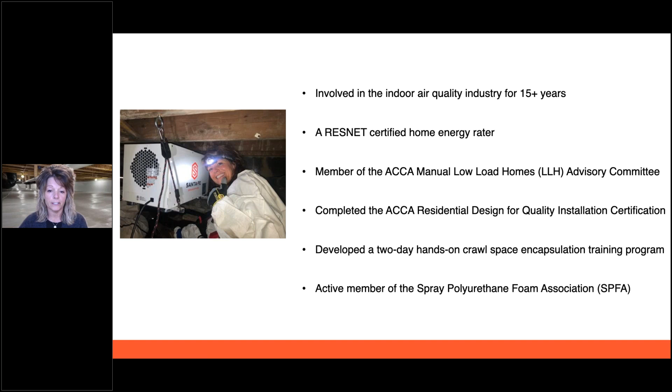So I've been involved in the industry for almost 20 years now. I'm a RESNET certified home rater, member of several ACCA committees, actually teamed up with some building science experts to develop a two-day crawl space encapsulation training course, and I also sit on the building envelope committee for the Spray Foam Association.

Now, before we dive any deeper into this, there's always one basic component that I want to make sure that everybody understands, and this is the second law of thermodynamics. And this is really what we need to think about when we are looking at dehumidification in homes. And that is hot goes to cold, wet goes to dry, and high goes to low. So anytime that we go in and we look at a customer's home, decide if dehumidification is the answer, we really need to look at what's going on to make sure that when we apply that dehumidifier, it's going to be successful.

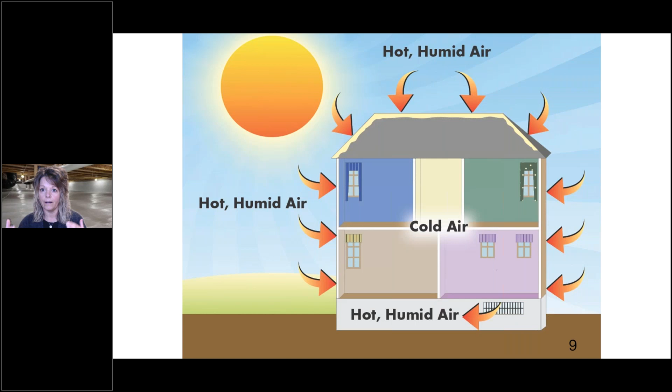And so as we go in deeper on the different code approved ways to condition a crawl space to manage moisture, we always need to keep in mind this thermodynamics law. Hot goes to cold, wet goes to dry, and high goes to low.

So crawl spaces, what is the opportunity for you here? They're widely used in construction. About 250,000 new homes a year are built on crawl spaces, and there's an estimated 76 million homes already in existence that have crawl spaces. Now, a majority of them are still unconditioned or open vented crawl spaces, but we're seeing more and more in the last several years a lot of homeowners looking for their crawl spaces to be closed, as well as building codes and green building standards now encouraging crawl spaces to be closed or encapsulated, especially if the mechanical systems are going to be located in those areas.

So we are seeing building codes incentivizing builders to close those crawl spaces, because if the mechanicals and the ductwork are going to be located there, we don't want to be sucking in that moist, hot air during the humid hot seasons. So we're seeing more and more this drive for crawl spaces to be closed.

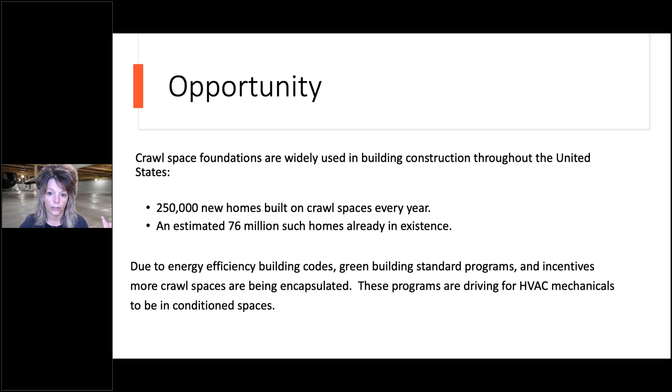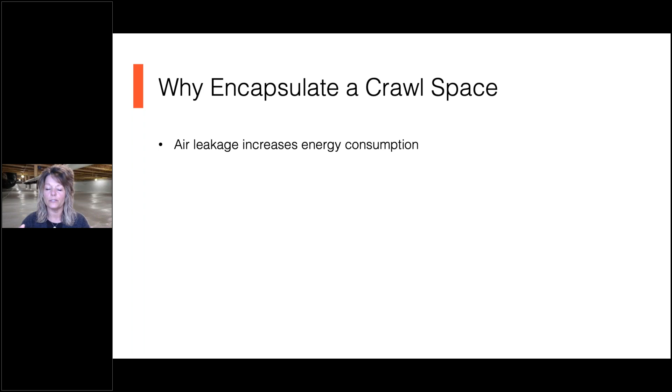So why do we encapsulate crawl spaces? Energy consumption is a big one. If it's hot outside and that air's coming below the home, you're going to be heating up that space. The majority of the energy loss is typically in colder times of the year, like right now, where you have a crawl space that's vented to the outside. Even with that insulation up in the ceiling of the crawl space, we're still bringing a lot of cold air into the house. So energy consumption is a big one. According to Advanced Energy, homes with vented crawl spaces are 19 times more likely to experience high relative humidity levels in excess of 70%.

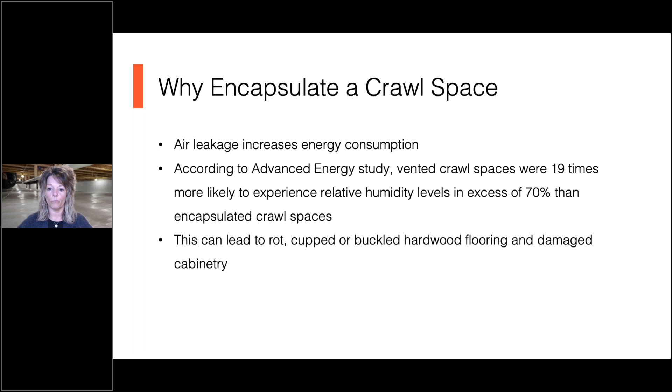This can lead to a lot of rot, cupped, buckled wood, hardwood floorings, damage to cabinetry. So really, again, if it's hot and humid outside and we're bringing in that air below, we're causing a lot of damage below that home that ultimately is going to go into the house.

And termites and other pests thrive. And then high humidity crawl space contributes to microbial growth, structural issues, and poor indoor air quality in living spaces. So there's a lot of reasons to not have vented crawl spaces in our homes.

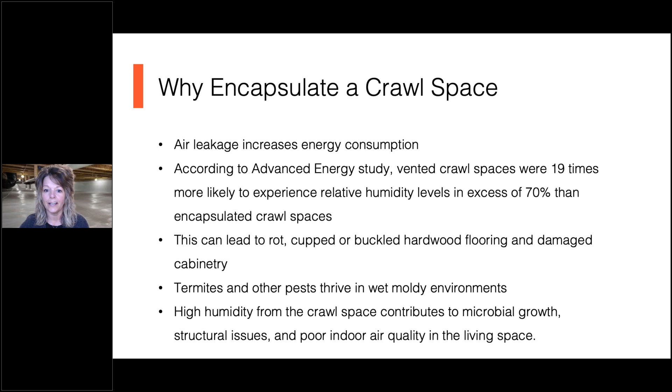We know better now. So encapsulation process, this is about as deep as we're going to go into the actual process, but we got to address bulk water first, air infiltration, water vapor, and then we got to manage moisture. So moisture management is what we're going to focus on of this process, because we're going to be going into spaces that hopefully all this other stuff has already been addressed, but they might not be using the best moisture management system in order to control the RH.

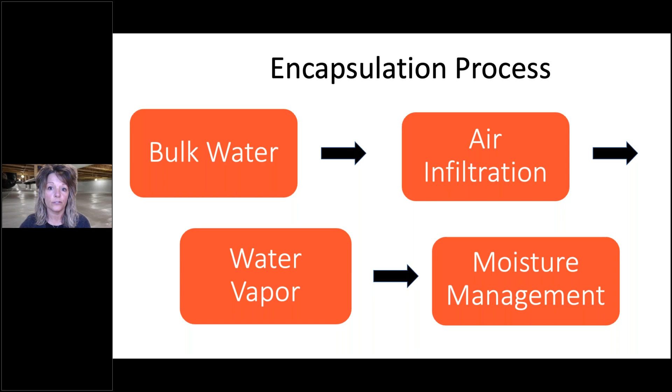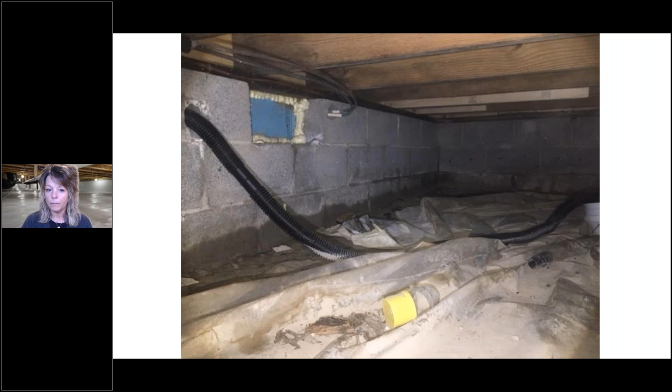Now, this also might be considered a closed crawl space, but adding a dehumidifier to this, you're probably just going to end up with an unhappy homeowner, because obviously this has a lot more moisture issues than something that typically just a dehumidifier can handle. So if you are into fixing crawl spaces with liner and other things, you could probably tackle this and add a dehumidifier. If not, someone who does closed crawl spaces for a living would probably have to come in and do a little bit more work on this before a dehumidifier could be applied to this house.

So moisture management, high humidity, even in closed crawl spaces without proper engineering of some moisture management system, they still will experience high humidity levels at certain times of the year. So that's going to be damage to the home. If anybody in the home has health-related respiratory issues due to possible microbial growth and other things that can be affected by high relative humidity, that could be an issue. Mold problems and pest problems. Of course, if you're in the pest industry, you know that pests like high humidity.

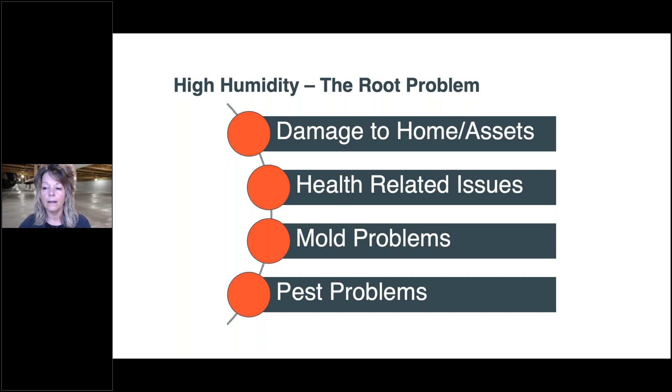So 85% and above, we get wood rot, blistering of paint. 75% and above, we get cupping of hardwood floors, staining on walls and ceilings. And when you're consistently above 60%, there are conditions that are created that are good for mold and mildew growth, or microbial growth also, as we will relate it to here.

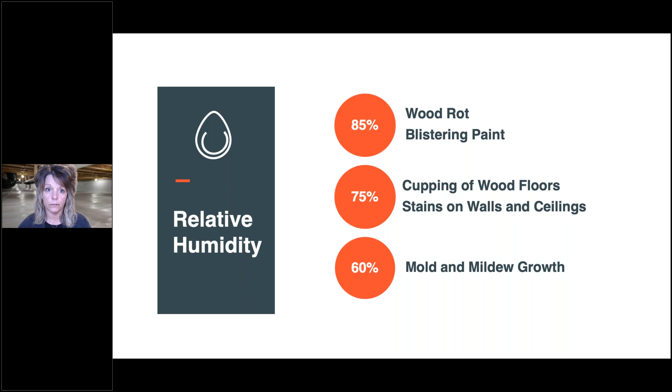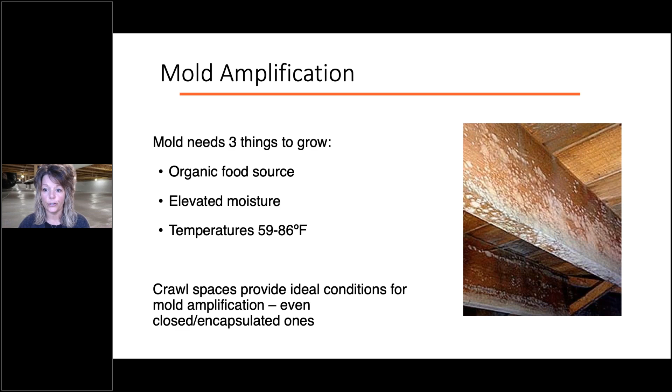So mold needs three things to grow: organic food source, elevated moisture, and temperatures. So crawl spaces, even when they are closed or encapsulated, can still have that elevated moisture. They still have those temperatures, and they still have the organic food source. So even if they are really well closed crawl spaces, but they're not using something to actually remove moisture, they still can have high moisture levels.

So this is just kind of in here because unless you are a qualified mold remediator or someone who has the certifications to identify mold, we do not encourage you to ever use the word mold when you are talking to homeowners. Microbial growth, you probably will see in a closed crawl space in certain climate zones if they are not using a dehumidifier, where there will be some sort of microbial growth, usually in the far corners.

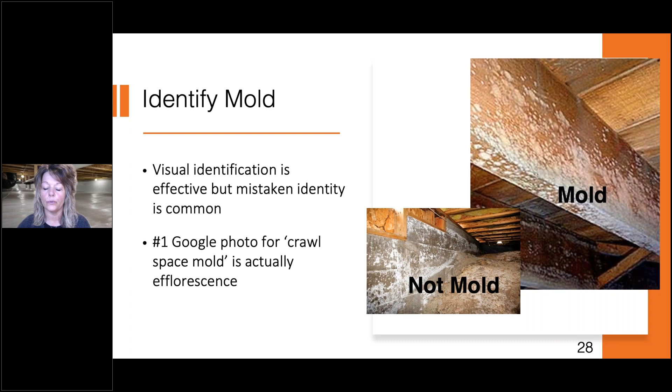But again, we are not here to advocate that you identify that, because if you see here, the #1 Google photo for crawl space mold is actually efflorescence, which is minerals that are coming through that block. It is not mold. So if there is mold, we encourage you to have that homeowner look for someone to remediate that if you are not qualified.

So to stop mold or microbial growth, you got to control the moisture. The wood moisture content needs to be less than 16%, and the relative humidity throughout the space should be maintained below 60%.

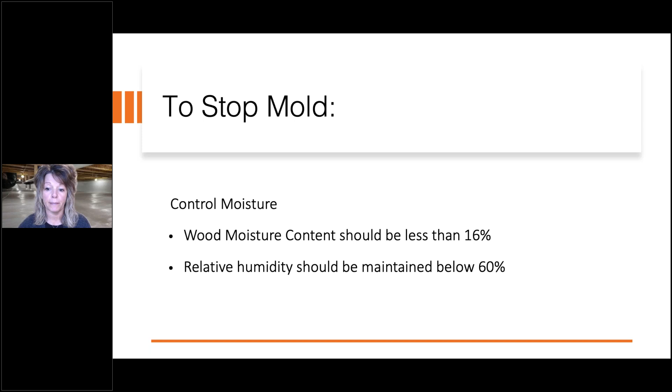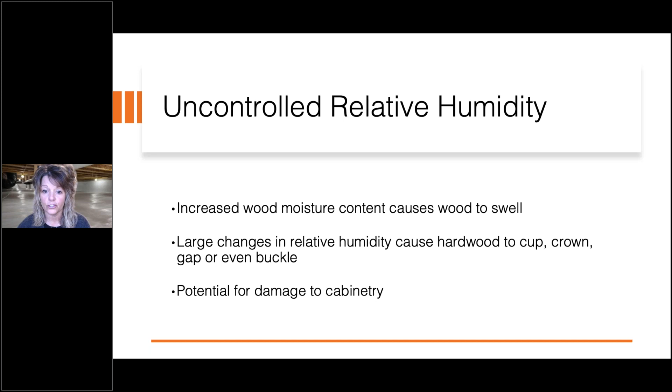So what we're going to talk about now is, according to building code, all of the different ways that are accepted to condition a crawl space. I'm going to throw up the 2021 code because this is the latest, and then I'm going to touch on 2018, and we'll discuss why you need to know these.

2021 will always trump 2018, and 2018 trumps 2015. So if you're applying one of these conditioning codes, ways to meet code according to 2021, that trumps what was in 2018. I had an email recently from a contractor in Virginia saying Virginia's on 2018, so he can't use 2021 - that's not true. If you go to the next year's code, they're not going to penalize you for doing better. So if you go above and beyond to the next code version, it still meets code.

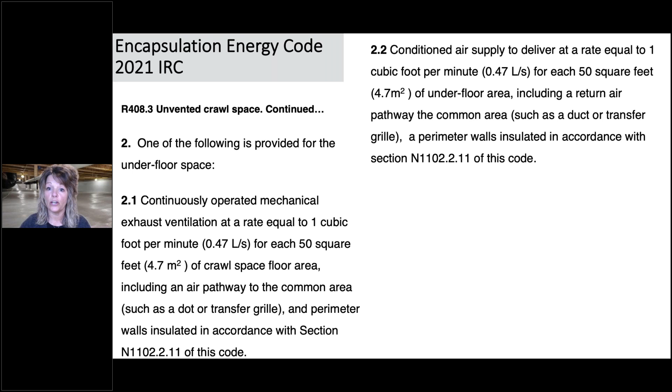Conditioned air supply to deliver at a rate equal to 1 cubic feet per minute, and again, you have to have a return pathway. We'll dive into that deeper.

Plenum in existing structures complying with section - basically using the floor joist as a plenum. I'm going to touch on this. I don't think I've ever seen this in a crawl space - I'd hope to God not to - and we'll go into that, but it can't be used in new construction. It is only in existing structures.

And then dehumidification, sized in accordance with the manufacturer's specifications. We actually worked with Joe Lstiburek from Building Science Corp to get dehumidifiers into code. The first year we worked on this was 2018. So this is the 2018 code version: basically everything's the same except dehumidification sizing requires providing 70 pints of moisture removal per day for every 1,000 square feet of crawl space floor area.

After this was put into 2018, it was recognized that this probably wasn't the best solution, or the wording wasn't the best way to go about conditioning crawl spaces, especially given so much variation in ceiling height and moisture still infiltrating the area. So that's why we went to the next code year - we had it reworked back to sizing in accordance with manufacturer's specifications. It was funny working on this as a group proposing it - they thought it might be too simple for code, since code's supposed to be more complicated. But really, we wanted to make it as simple as possible: size in accordance with the manufacturer's specifications.

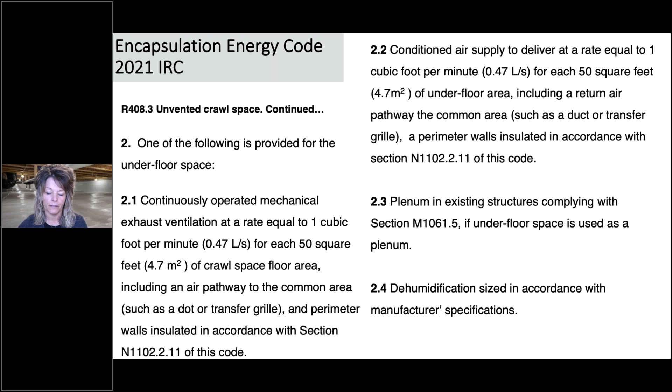We'll dive a little more into what that means. So if your state jurisdiction is on 2018 and it says 70 pints, which is possibly overkill for what's needed, you can pull out the manufacturer's recommendation for sizing according to 2021 code, and that does meet code. Now, you're going to have to work with your inspector on that, but that's the way it works.

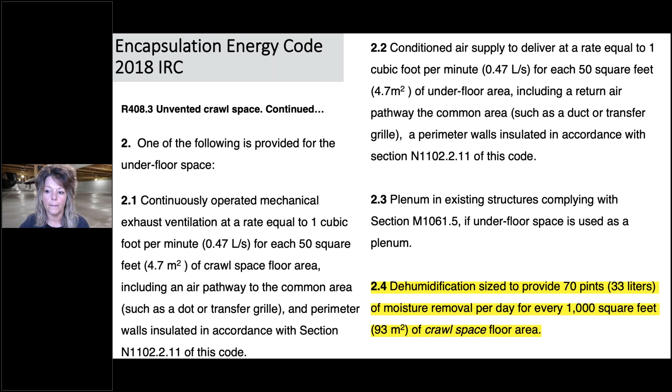Continuously operated mechanical exhaust ventilation.

The pros of this: the equipment is relatively inexpensive, and that's what you're going to see with all of these we go through. Where equipment is relatively inexpensive, that's probably what the builder is going to do, or another contractor comes in and encapsulates or closes that crawl space and sells the homeowner on an inexpensive way to condition it.

So we're going to see a lot of those out there, but the reality is, once that's been operating that way for a while, typically it's not controlling the moisture in those spaces. Conditioning a crawl space, really the only thing you truly need to worry about, if it's been properly closed, air infiltration minimized, bulk water taken care of, water vapor addressed, you're really only concerned about the relative humidity in that space at that point. So conditioning really means moisture control.

The cons of this mechanical exhaust ventilation: it potentially, most likely in the humid times of the year, is going to increase the relative humidity in the home, in the living space. I'll show you why in a minute. Not good for indoor air quality. You can't set it to a specific RH, and it can cause comfort issues throughout the house.

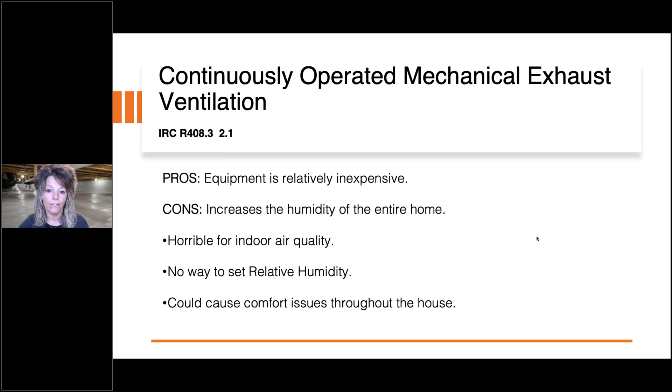The reason being is this is what that is going to look like in the crawl space. Basically, we've got our floor grill, which is allowing conditioned air per code - we have to have this in there to come in from the house - and we are exhausting out the vent in the crawl space. The challenge with this is when you exhaust air out, makeup air has got to be brought into that house somewhere.

The house is always trying to equalize. So when we talk about thermodynamics, the second law, where high goes to low - if we're exhausting here, that means probably in the attic area, we're pulling air in.

So that potentially is bringing hot, humid air from the outside into those upper levels of the living space and pulling it through the rest of the living space to exhaust. We typically don't want to create that sort of negative pressure, especially in hot, humid climates where most of the time is where we are seeing crawl spaces being used.

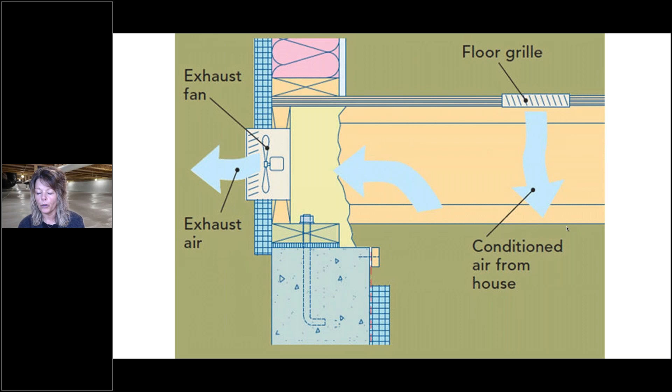So I would not recommend this. If you see this in a house, just starting in the spring, summer, fall, if you're taking RH measurements in that crawl space, you're probably going to have some pretty high levels going on there.

So, conditioned supply air in the crawl space - I see this one quite a bit. Really no equipment is needed besides some supply register and floor register.

The theory is that when you're air conditioning - and I'm looking at it from the humid season - you're putting drier air into that space. The challenge with this is that air usually is cold air, and when you decrease the temperature of air, you increase the RH. So every degree that you go down in temp, the RH goes up 2%.

That's why relative humidity might not be the best way to measure this; dew point oftentimes is. So we're putting cold air into a cool space, and that's only going to happen if the homeowners are running the air conditioning based on what's going on in the living space. So you could have high humidity down there, and just trying to control it by really diluting with some cool, drier air from the living space.

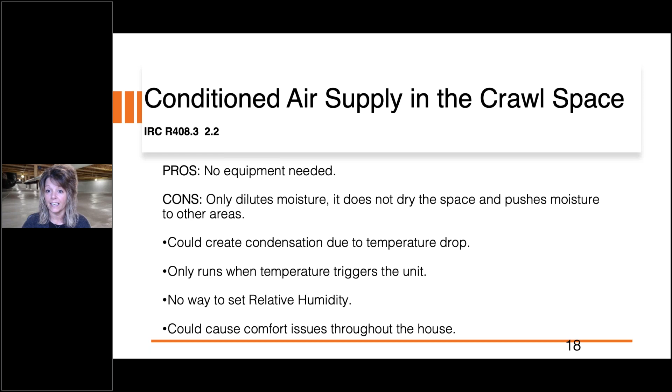So really not a good conditioning method for controlling the relative humidity. And this one I see, again, because it's inexpensive - I see it quite a bit throughout the Mid-Atlantic and the Southeast. That's what this would look like.

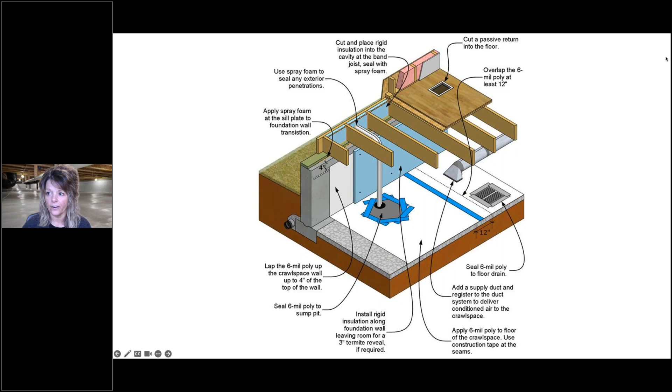They basically tapped into the supply plenum and put in a supply register. Here is a rendering of how that looks: basically you've got your passive return grill here, and then you're doing some supply air from that. Here's another illustration - conditioned air, and then we've got our floor grill there to share the air between the spaces.

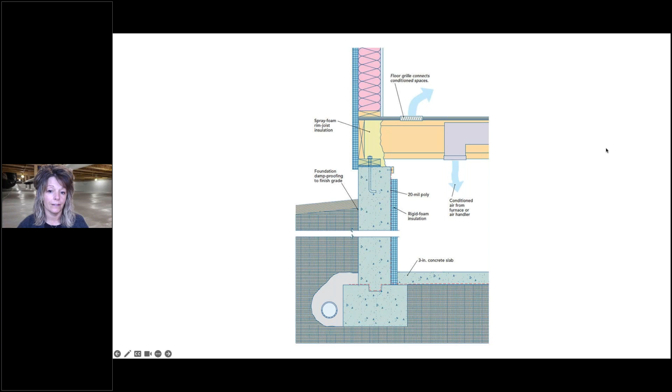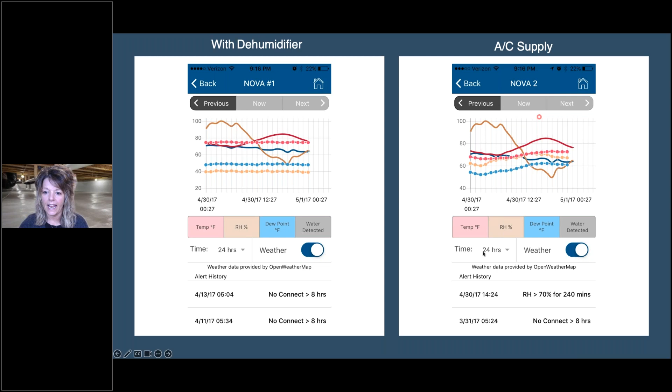Now this other house here, again we've got rainy times, same time of year. We got the dew points getting above 60 degrees. So anywhere the surfaces are 60 degrees or above, we're going to start having condensation. The relative humidity was consistently getting to that 70%. Again, if you're counting on supply air, that means the AC has to be running to put that drier air into that spot. So not a consistent way to control the relative humidity.

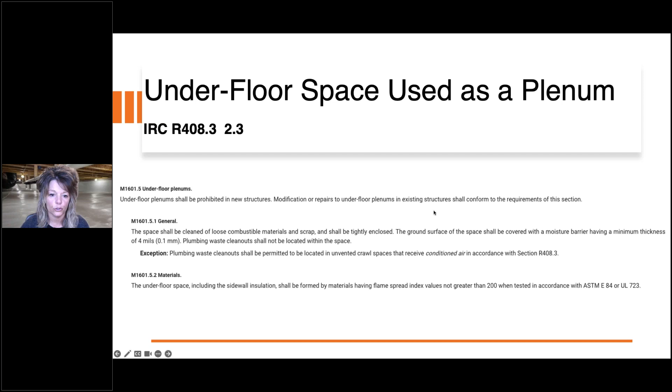So underfloor space used as a plenum—again, if you go into code, this is prohibited in new structures. It's only for repairs to underfloor plenums. Basically what that means is you're turning this cavity in the floor joist into a path for supply and return air for the HVAC system to condition that space.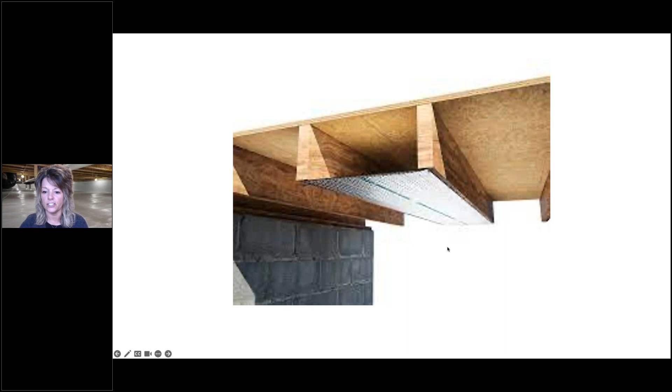I wouldn't recommend it. If you see this in a crawl space, this is probably your number one opportunity to sell a dehumidifier for sure. This air is then traveling throughout their house because it is being pulled or supplied into the HVAC system. So huge opportunity there.

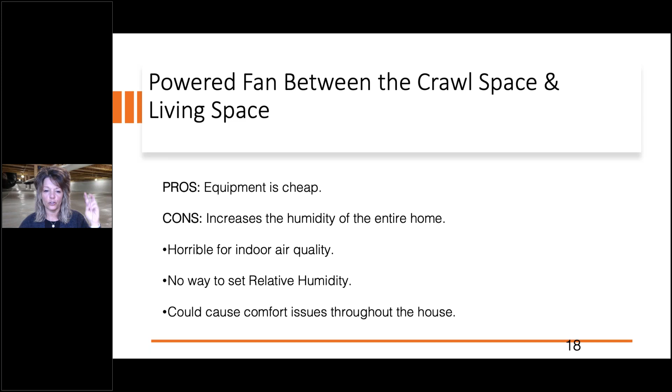Other ways from code years past, or just strategies where someone might not even meet code, might go in and try to condition that space using a powered fan between the crawl space and living space—basically sharing the air between the living space and the crawl space to control the relative humidity. Here's an illustration of what that might look like.

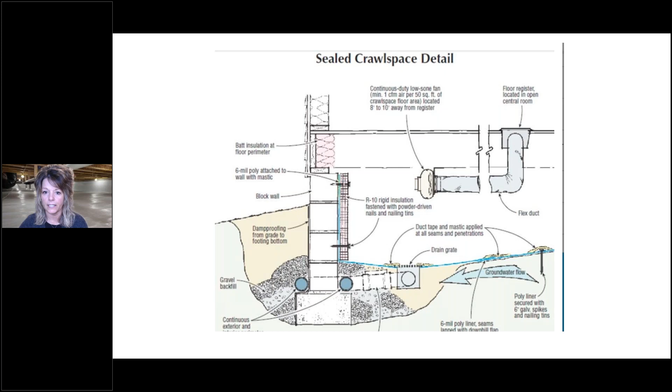So if you see a powered fan—now this is not radon, this kind of looks like a radon fan, but this is not to address radon. This is just to bring in air from the living space. Then there's a powered exhaust fan between the crawl space and the outside. So basically we're trying to control that air below the home using a powered exhaust fan.

These typically run off some sort of sensor that identifies when the RH in that crawl space has gotten too high, and it'll exhaust air out and bring in through another vent makeup air into that crawl space. Again, this only works if it's drier outside than in the crawl space, which typically is not going to be during the spring, summer, fall, the humid times when dew points are high outside.

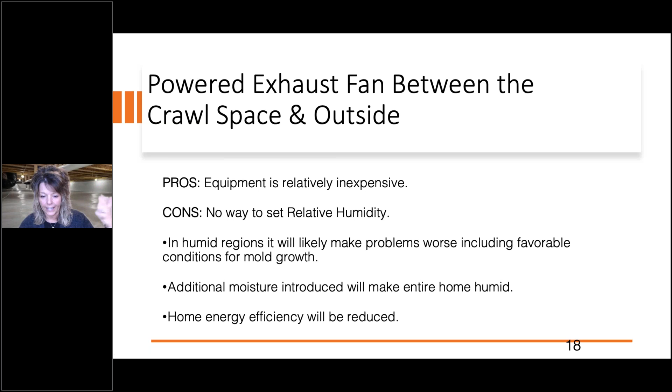And if it's cold outside, which is typically going to be the time of year when it's drier outside than in that space, you're probably bringing in colder air, which can create cold floors, high energy use, that sort of thing. That's what something like that might look like. So these are all ways you can identify potentially what conditioning method they're using for that crawl space.

So the two things they have in common: typically little to no equipment costs. A lot of builders who are getting into closing their crawl spaces, these are typically going to be their first choices for meeting code. They do not manage humidity year round. And the other most important thing is it allows for communication between the crawl space and the living space.

For those of you in the pest industry on this webinar, we know especially for termites, at times there's going to be chemicals that have to be utilized in that crawl space, and typically we don't want those chemicals being pulled in or shared with the living space. Again, all of these allow for that communication, unless you're just using those exhaust fans on the crawl space without the floor grill.

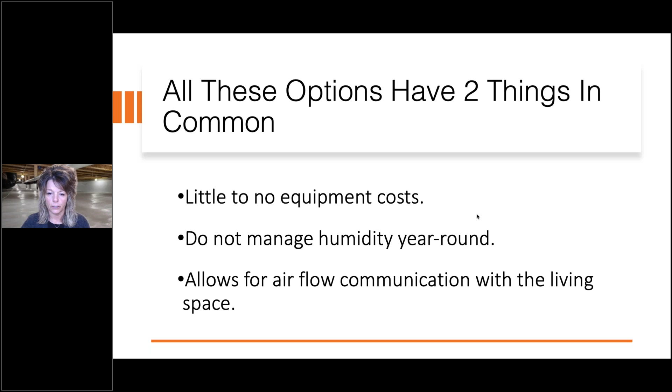So what to look for? If you're going into a home that is utilizing these other methods for conditioning a crawl space, this is a prime opportunity for you to be able to propose a dehumidifier to the homeowners. And there's other things that you can look for to be able to propose this outside of what they're already using.

So immediately, if you walk into that living space and there's musty odors, that's most likely because 50% of the air in the home typically at some point during the year is going to come from that crawl space. That's typically during the heating times, but it's going to be sharing some of that air, no matter how well they try to minimize the airflow from the crawl space to the living space, with caulking and spray foam and all of that. There always is going to be communication to some extent.

So you will smell musty odors in the living space. You're going to do measurements. How high is the RH in that crawl space? That's very important to be able to share with the homeowners.

If you walk into the living space and they've got the thermostat set pretty low during the cooling season, it could be more because of a comfort issue. That's what people do. They're uncomfortable in their homes. It doesn't matter if it's due to high RH or temperature. The first thing they're going to do is go to their comfort control center, which is the thermostat, and start cranking down that thermostat. So it could be just because they're getting high RH from that crawl space.

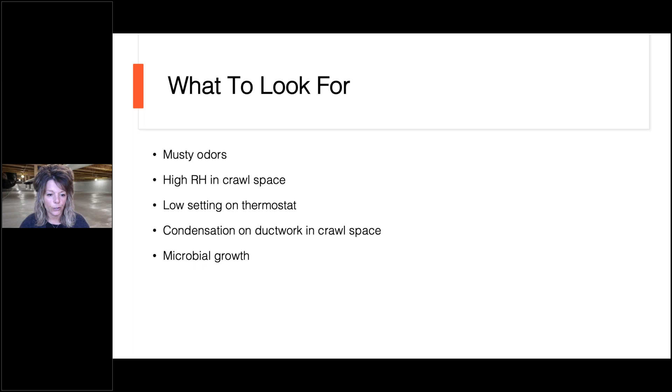Potentially, if there's condensation on the ductwork, that means that there's a high RH in that crawl space. Microbial growth could be any kind of growth in there. We don't know what it is, but we've got an environment where there's microbial growth happening.

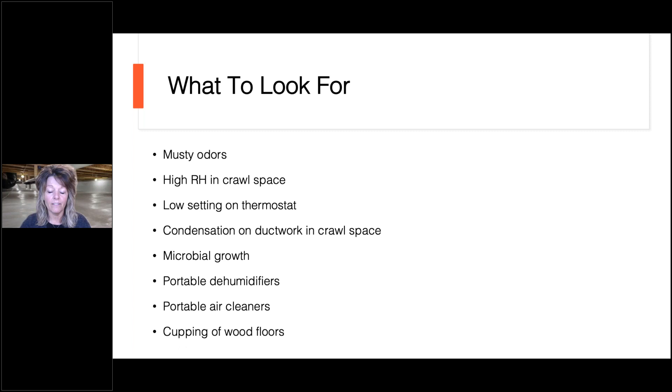If they have turned to portable dehumidifiers, whether there's already a portable in that crawl space because they went out to Home Depot and bought one, or if they're using portables in the living space. Portable air cleaners as well. If you see those going on in the living space, it could be because there's an issue in that crawl space. And then obviously if they've got hardwood floor issues, that's something to look for as well.

So typically meters needed if you are a contractor that wanted to go in and propose maybe a dehumidification. What we recommend is taking readings because homeowners can't argue with the data. So a hygrometer, something that's going to measure that temperature and relative humidity, and then also address some dew point as well as important. And then moisture meters.

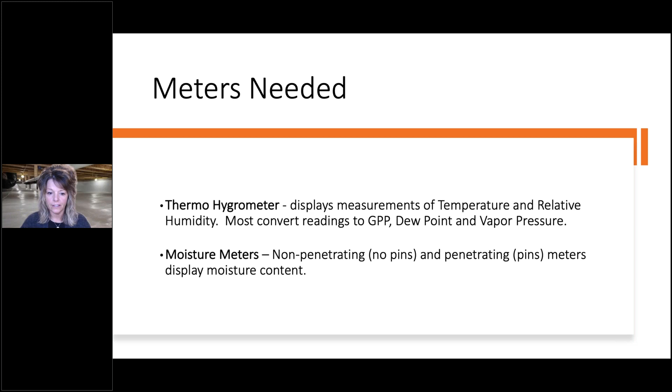So we can get some, you know, the pillars, the floor joists. I usually recommend the non-pin ones because the pin ones will leave some marks in that wood, but get a moisture reading to see, is that wood absorbing moisture to a point that we could have an issue down there.

There's a dew point calculator out there that I highly recommend. It's called dpcalc.org, yep, is the website. And it allows you basically to go in and put in whatever readings you get. You can go in and put in your readings.

Now, this is probably more what's going on outside, not necessarily in that crawl space. But when you play with this and you put in what the temperature is and what that RH is in the crawl space, it's going to give you dew point. And again, dew point is where we're going to see condensation. It's also going to show you about how many days we have to a potential mold risk based on those conditions. So great resource, highly recommend it.

dpcalc.org is where you can find this.

So why is crawl space isolation from the living space so important? Again, when we kind of talk about what's going on in that space, especially when it comes to potential pesticides being used, pressure treated wood that's used. We want to isolate the crawl space from the living space as much as possible. And there's an article out there that talks about all the contaminants that can exist in a crawl space.

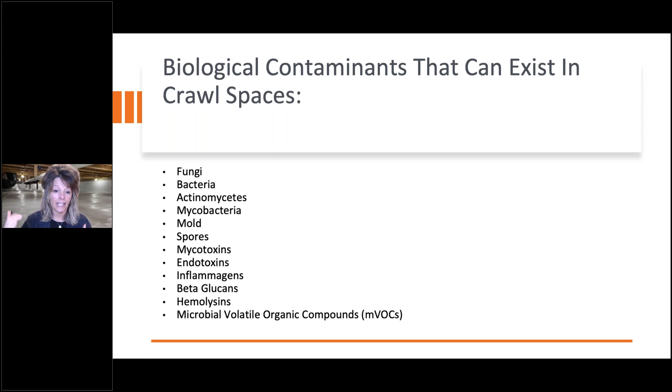So a lot of times, all those other conditioning methods out there are sharing living space air with crawl space air. My recommendation, and one of the biggest perks of using a dehumidifier, is not to have to do that, but to isolate those two spaces as much as possible. That's a huge selling point of using a dehumidifier in a closed crawl space versus all these other conditioning methods.

So finally, dehumidification size in accordance with manufacturer's specifications. It is the only way to truly control the relative humidity in that space to a set RH point. It can also decrease the humidity in the living space, because if we control it below the home, it won't be making its way into the home.

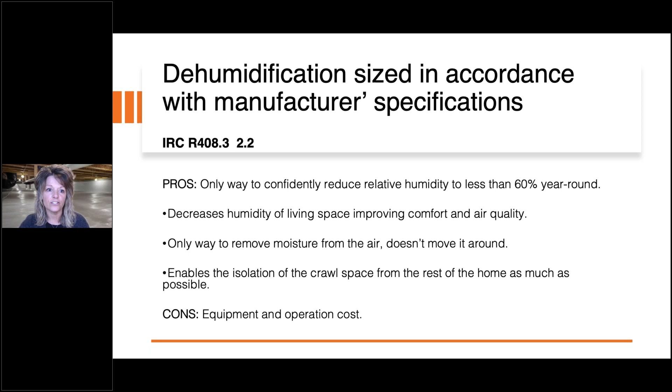It enables the isolation, so we're not sharing any of that air with the crawl space. Now the con is the equipment and operation costs. But the reality is there's always going to be an energy penalty for using dehumidification.

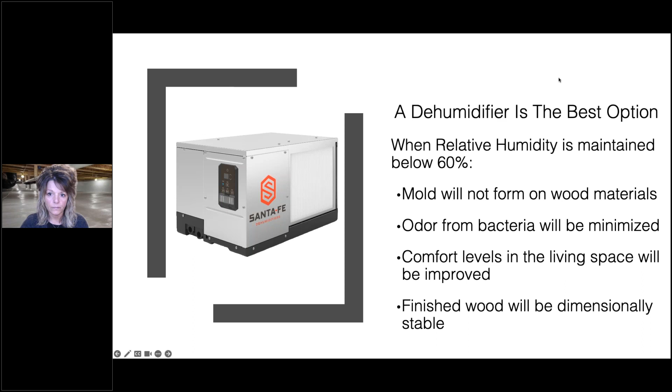So humidity removal, this is the key, is the only solution with a dehumidifier. And it's removal, not dilution. All those other forms of conditioning a crawl space are dilution.

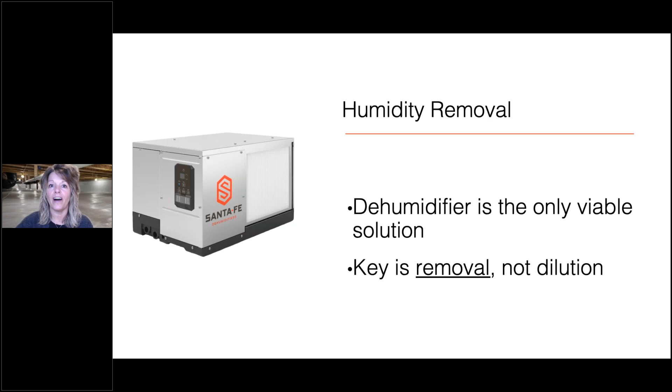And the more energy efficiently we see homes being built - the whole point of building an energy efficient, high performance, tight home, which code is getting us to those levels - is to run the largest system in the house as little as possible. So if we're counting on air conditioning to control the relative humidity in our crawl space, the tighter our homes get, the less that is even going to potentially be an option, even at peak load conditions during the middle of summer. So I think moving forward with conditioning options, code will see these other options going away because of how tightly and energy efficiently we're building our homes.

So a dehumidifier dries by condensing the moisture, getting it out of the space. You really want a high efficient dehumidifier with low temperature operation. This is the big difference between those Home Depot big box store dehumidifiers versus a commercial grade crawl space dehumidifier design - that low temperature operation.

A lot of those, once they get into a cooler 65 degree temp space like a crawl space, which is the average temp, they're going to lose capacity very quickly. I remember growing up with one in the Midwest in our basement, and as soon as you turn that knob past one, it turns into a solid block of ice just because it can't operate at those lower temps.

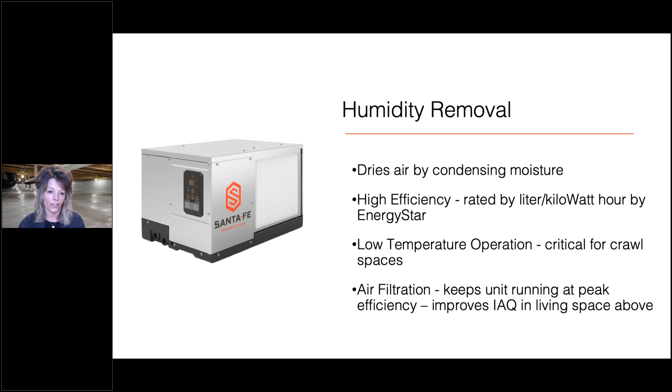And then also you want one with high air filtration. Our dehumidifiers have MERV 13 filtration, which collects a lot of the particles in the air from below the home, so it won't make its way into the living space.

So sizing - that criteria for a dehumidifier as part of 2021 is according to the manufacturer's recommendations. And there are no regulations on what the manufacturer can set for their sizing parameters. So I can say 1,000 square feet, and the next dehumidifier says, well, they do 1,000, we do 2,000. There's no regulation on claims of dehumidifier sizing, so you really have to become educated to understand this more.

So there are three major factors that you need to consider when sizing a dehumidifier. How much humidity is in that space? Now, when you go in and measure the RH in that space on the day and time you are there, that's a snapshot in time. You can put in data loggers to get a better understanding.

So you're not always going to know just based on that particular time frame how much humidity is in that space. The size of the space, you know that, and then the temperature inside the space also, because remember, for every degree it goes down, the RH goes up 2%. For every degree that the temperature increases, the RH goes down 2%. So understanding also more how RH and temp gives you a dew point, and dew point is going to let us know really how much moisture is in that space.

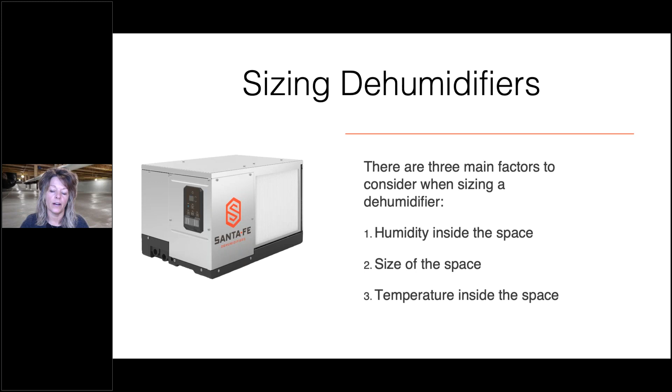Now, if you have too small of a dehumidifier that can't handle the moisture load in that space, it's going to run and run and run because it can't get to that setting. So you always want to have more capacity than you need. And so you will see in our sizing recommendations, we are extremely conservative because we always want you to have more capacity than you need. And you don't want a homeowner calling you because you sold them a dehumidifier that isn't doing what you told them it would do. So again, look at our sizing recommendations, and we are far more conservative than a lot of others out there, and that's a good thing.

That's a good thing. So our lineup for dehumidifiers in the crawl space is, we have a Compact 70, which we say is up to about 1,800 square feet, and that's 8-foot ceilings. Now we're going to get a little bit more into the pros and cons of using the smallest dehumidifier according to that sizing. But the reality is we see this one go into crawl spaces probably the most because of crawl space door size, being able to get it in there, but we want to be able to do some stuff to this in order to get maximum water removal with this, and we'll get into that.

Our newest unit, which is the Oasis 105, should fit into most crawl spaces, and really is the one that we would recommend. It has dew point cutout, which is really important because in wintertime we'll get lower temperatures in that crawl space, and the RH can still be high, but the dew points are low, so we don't need a dehumidifier running. There's not that much water in the air. So this dew point cutout on the Oasis will prevent the unit from going into defrost, which ultimately extends the life of the dehumidifier.

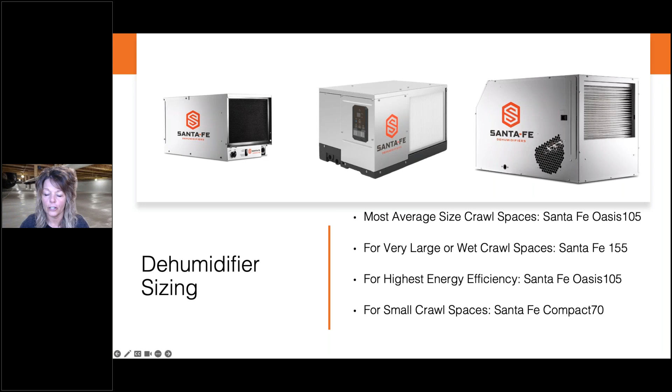So really cool unit. And then for really big crawl spaces that have large access doors, we have the Santa Fe Impact 155. And that one we see go into a lot of larger homes. Again, crawl spaces that have higher ceilings, maybe coastal large homes, and then commercial applications as well.

All right, just checking here. Any questions yet? All right.

So one of the things that I had mentioned with that compact is dehumidifier air movement and ducting. We highly recommend that our dehumidifiers on the exhaust or the supply side, so the warm, dry air that's coming out of that dehumidifier, be ducted with flex duct away from the dehumidifier. So this will dramatically reduce the short cycling on that dehumidifier, because we're not creating this microclimate where the RH sensor in the dehumidifier is being affected by the dry air coming out of the back end of it.

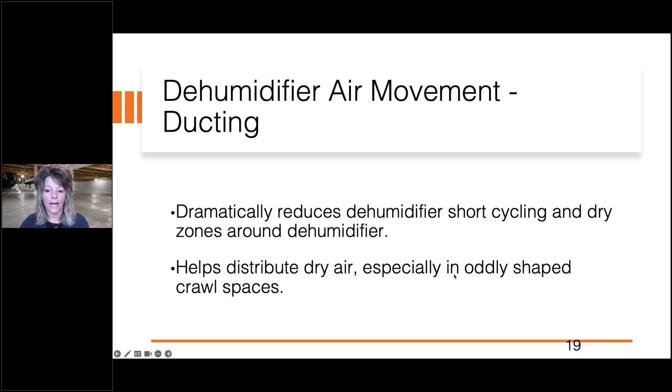It also helps get that drier air to the farther corners where we might hit dew point potentially in those farther areas. And especially when you get odd sized shaped crawl spaces that might be like a T or an L or have an opening, you can distribute that dry air into those spaces and get better overall RH equilibrium in that space.

And that's how this would look with that compact, where we're getting that drier air away from this area of the crawl space. This also allows us to be able to locate the dehumidifier in an easily accessible area that might be closer to the crawl space door, where we'll have an electrical plug. And we also know that it'll hopefully be maintained a little bit better if there's easier access.

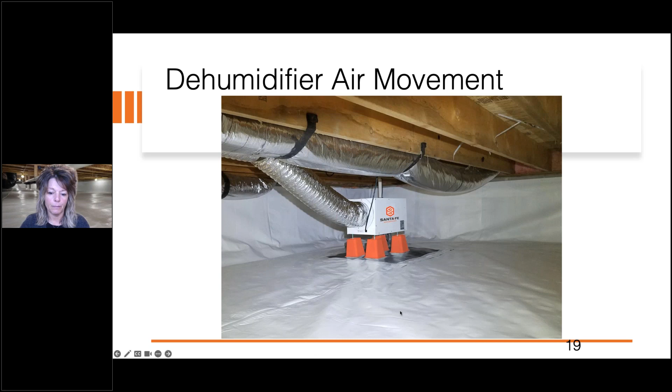So typically dehumidifiers are recommended to be centrally located in the crawl space, but again, that makes it hard to get to them as well as to maintain them. So by ducting this, we're just getting that better communication of drier air throughout the space and enabling us to maintain that dehumidifier a little bit easier as well.

So again, we talked about the big box units. Just not ideal. Also, if you ever go into a crawl space and you see one of these small big box portables, make sure that either you or you encourage the homeowner to go on to the consumer protection website, because there's been massive recalls on millions of portable dehumidifiers that actually start on fire. So it's the control boards, and it's not specific to one manufacturer, because this control board manufacturer out of China supplied these to lots of portable dehumidifier manufacturers, and it causes them to start on fire.

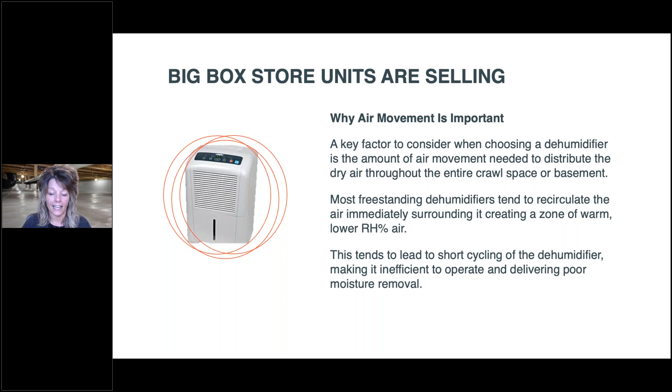So some really scary YouTube videos out there. If you put dehumidifier fire into YouTube, you'll see people carrying them smoking out of their house, and all of a sudden they just burst into flames. I've actually been into several crawl spaces where I've seen these, went on the website with the homeowner and found out they were part of the recall. So again, something to be able to educate homeowners on if they are using those.

So homeowner benefits: better indoor air quality, not only in crawl spaces, but if you're working in basements as well. Again, 50% of that air is making its way into the living space. So I know there's a lot of homes out there in the Mid-Atlantic, and actually we call them the green grass climates, anywhere where you get about an inch of rain or more a week during the spring, summer, and fall. You are in a climate that should be using dehumidification, whether it's a crawl space or a basement. But that's better indoor air quality for the living space.

Helps with adverse health effects or respiratory issues when you can control that humidity. Protects against damage in the home, greater comfort in the home, fewer pest problems. And then this gives you an opportunity to develop a longer term relationship with that homeowner, because those dehumidifiers should be maintained. The condensate line should be looked at at least once a year, and also the filters need to be changed out. So a long-term maintenance program with the homeowner also is a great benefit for both parties.

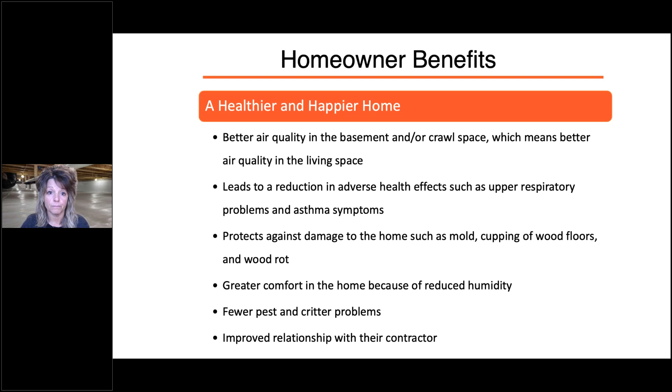So one of the questions that we often get is, what is the electrical usage of this dehumidifier? How much is my energy bill going to go up? So there's a website out there called REDCalc, and it's Residential Energy Dynamics. And they have a ventilation electrical usage calculator. So what I did is put in the power rating, which is the watts of our compact, how many days of the year it was going to be in use.

And I'm saying that dehumidifier is going to run 20 minutes out of every hour during the day. So obviously being very aggressive in the runtime of that dehumidifier, and put in 13 cents per kilowatt-hour. And that's going to cost $126 for that time period for that Compact 70 to run in that crawl space. So a very energy efficient way to maintain the relative humidity and moisture in that space.

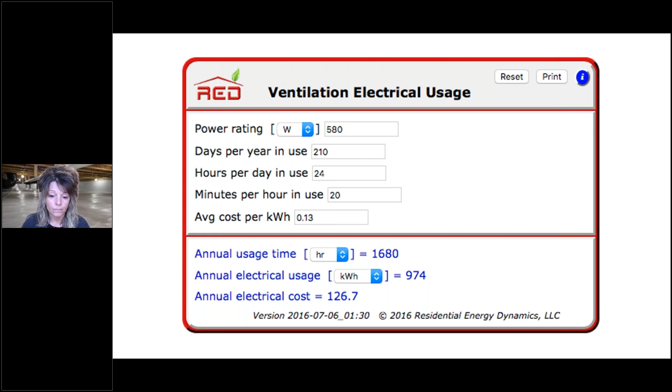So while you might not be encapsulating crawl spaces, and you are interested potentially in adding that to your business lineup, we do have a 2-day building science encapsulation class that we offer. We have a restoration school outside of Atlanta, Georgia, that we've teamed up with that offers this. And we actually just offered this course up in Madison, Wisconsin at our headquarters in November for a group of contractors and distributor partners to be able to come up to Madison.

2 days, hands-on. We go over the building science of encapsulating crawl spaces. We actually have a mock-up crawl space that you encapsulate, and we take you on a tour through the plant where our dehumidifiers are made in Madison, Wisconsin. So if anybody's interested in that, you can reach out to me or anybody on our Santa Fe team to learn more details on that.

But if you want to go a step further in learning more about encapsulation, this is the only building science course there is, and we actually teamed up with Advanced Energy out of North Carolina, which is the leading research firm on crawl spaces, to develop this program, as well as some other building science experts, Joe Lstiburek from Building Science Corp, Allison Bailes from Energy Vanguard. So a lot of people went into this knowledge. So nothing else like it that's offered out there.